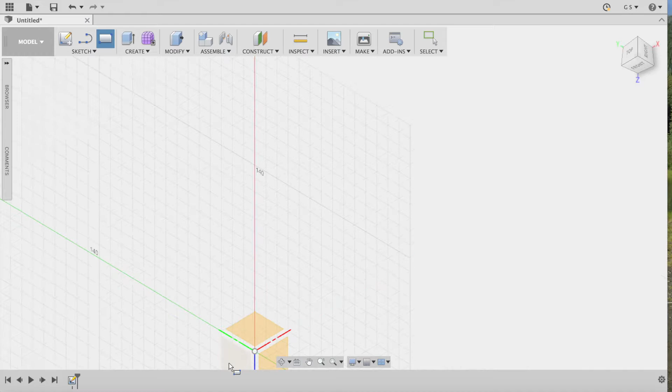We're going to click in the plane. It's a little hard to describe, but if you're wondering what I mean by the plane, we can select to have our sketch stand up on its edge if we wanted to, but I don't. I want to choose the standard XY plane that we've got here, and for that I'm just going to click here.

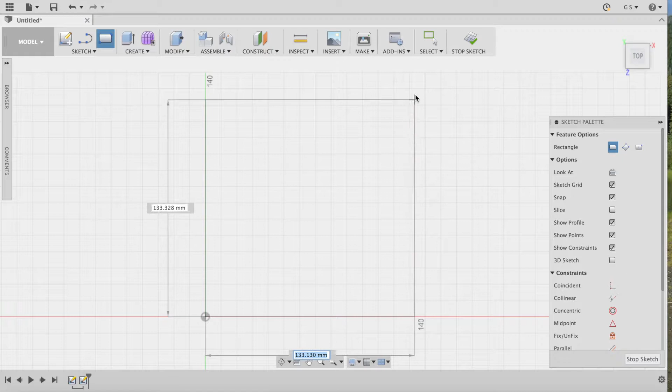We're going to use our two fingers to pan down to here, and we're going to have our one big rectangle. I'm going to click at the origin, making sure that I'm snapped to it—that's what the blue box around the origin means. So we snap, click, and snap to our grid here, and there's our rectangle.

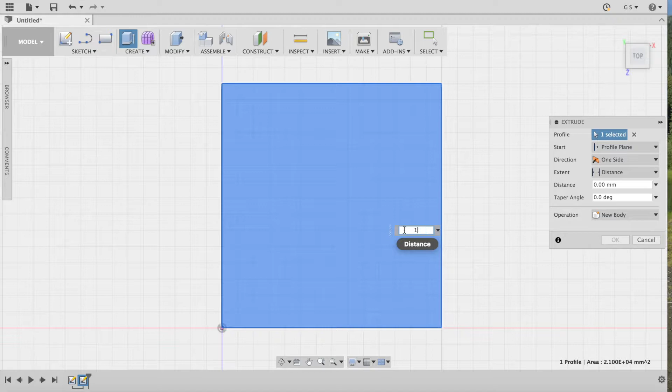So we stop our sketch, and now we're going to select this and go to Create and Extrude. It's selected already, and according to our design we're going to make this 1.5 centimeters, or 15 millimeters. We'll press OK, and just so you get a chance to see what it looks like, that's our base right there.

Okay, so the next part is going to take a little bit longer, but we now need to design the constituents of our pieces. Oh, you know what, I just noticed something—if I were doing this in front of a live audience, I'm sure someone would have mentioned that all of a sudden I'm not designing a square here. So we need to be able to modify this so that it's actually a square. You know, no big deal, we can fix this.

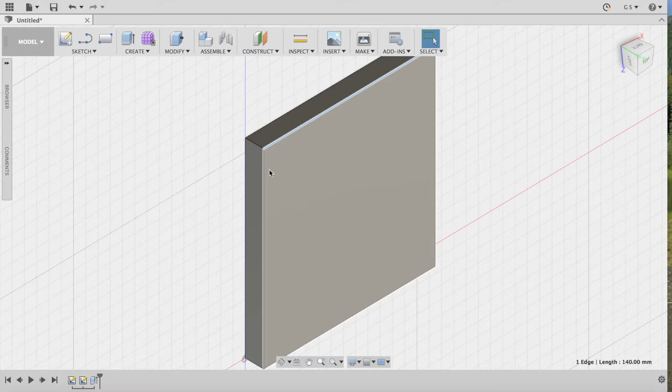I'm going to look at our tool here and go to Modify, then Press Pull like we've done before. I want to select this face. Okay, there we go—I'm going to get rid of the edge here, I don't want a fillet. Not sure why it did this to me. I want Press Pull, and I want to press this face in by 1 centimeter.

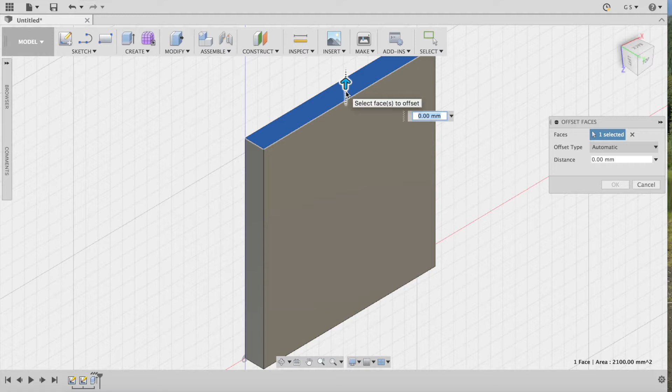All right, so now I'm just going to go back to my face, and we're going to push. By default, this is the positive direction, so I actually made this rectangle 1 centimeter too long. That means I have to make this -10, and then you'll see that I get the square back. So the cool thing is that even when you make mistakes in Autodesk Fusion 360, you can fix them—it's not that big a deal.

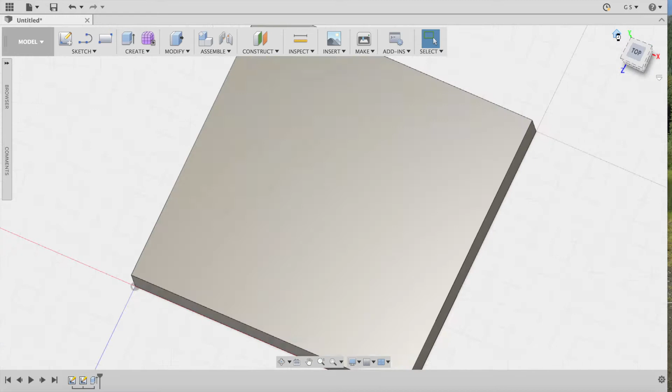So just to go back to our base—there it is. We'll do a pinch motion just to get back to here, and now it's time to make some pieces. What we're going to do now is go back into Sketch and make a 2-point rectangle. As we said before, I have to click my plane, so I'm going to make this in the same plane as I made the base here, and I want to make a rectangle, or in this case a square.

If you remember before when we were doing the design, I was thinking of making my squares or side lengths all 20 millimeters, or 2 centimeters. But then I realized that might make the edges of the puzzle a little bit weak because they might only be half a centimeter big.

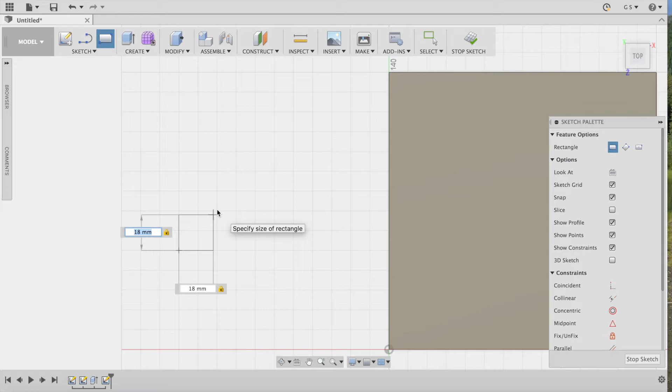So I'm going to change the design a little bit and make my side length equal to 18 millimeters, or 1.8 centimeters. I'll put 18 in here, press Tab to get to the next dialog box, and type 18 there as well. All I'm doing is making my square a little bit smaller than the full 2 centimeters, so that when I put all the pieces together, the edges will be a little bit larger. I just want to make sure everything fits. Now I'll press enter, and there's my square.

The next thing I'll do is go to extrude, click on the square, and make it 13 millimeters, like so. We're done there. Next we have to draw our triangle.

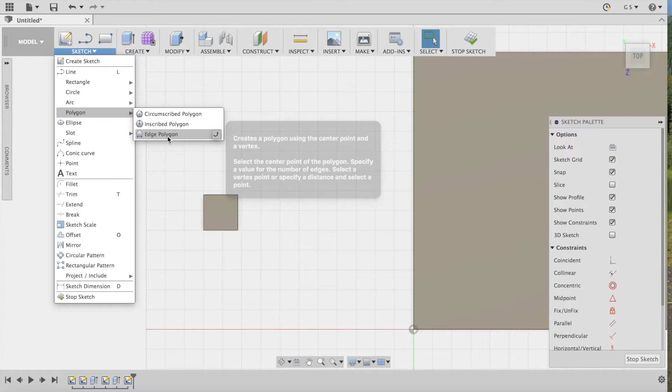It's an equilateral triangle, so we're going to go into sketch, and then into edge polygon. This basically draws a regular polygon for you with a side that's exactly what you specify, and then we'll be able to specify the number of sides. It's a pretty cool tool, nice and easy for what we need.

I'm going to click here, and I'm just about to click my second point, but we want to make the side the same as our square, so that becomes 18, like so. I'll press Tab, and we're going to press there. Okay, that's good.

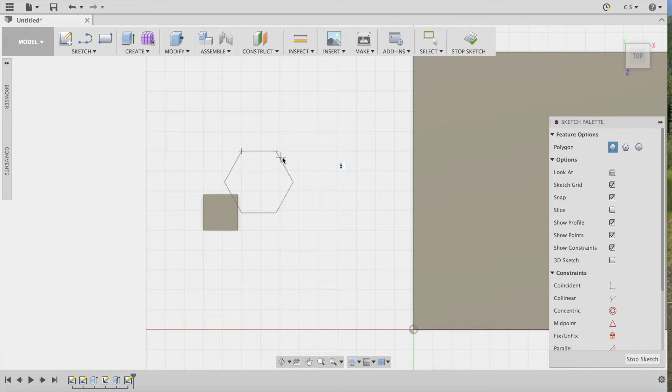Excellent, now I have to go in and figure out how many sides to make this. I have to admit this is a bit strange and you can hardly see it, but there it is, it showed up: edge number. So we want this to be a 3. Now we've created a regular triangle, meaning all the angles and sides are the same, and the sides are 18 millimeters, or 1.8 centimeters, matching the square.

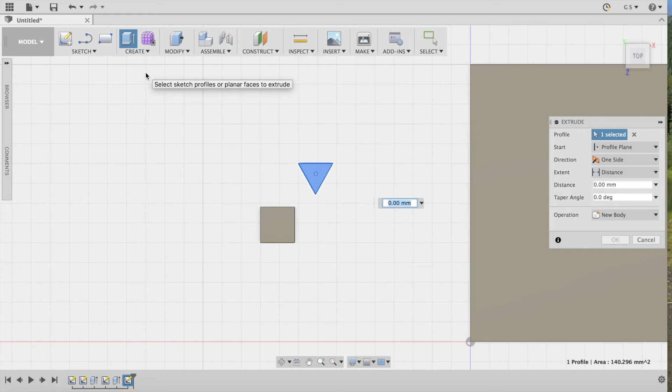I'm going to press return, and there's my sketch. I'll go over here to stop sketch to get rid of that dialog box, select our body, go to extrude, and go to 13 millimeters. This is already highlighted, so I just typed in 13 and pressed return.

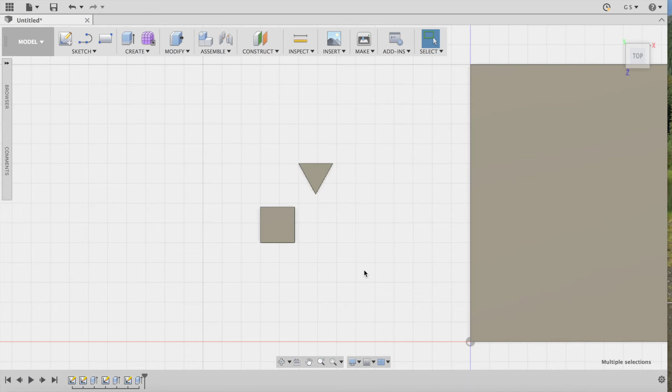And there I have my two shapes. Alright, so now we're going to pick up our shapes and copy them. Actually, I remember now, I have to go to move first, so you press M for move. We're going to select our two shapes, our two bodies, and go to create copy, like so, and we're going to pick these up and double them like this. Then we'll press OK.

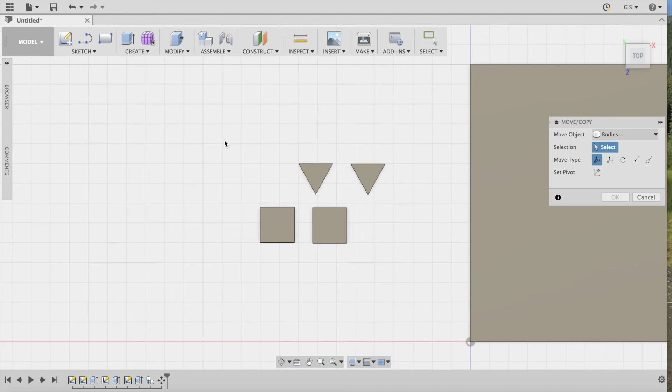We go to move again, select all 4 bodies this time, go to create copy, pick them up and move them, and now we're going to have some extras, like so. And one more. I'm going to play around with these right here, and then as I need them, I'm going to create some extra copies.

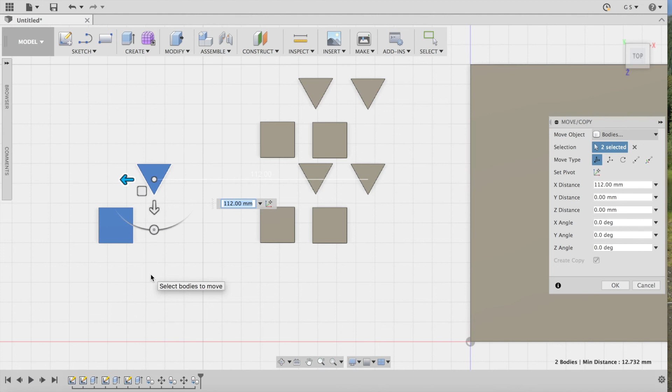So actually what I really want to do here is select one triangle and one square, put them off over here, and as I need extras, we can start playing around with that whole thing. I'm going to press the move menu one more time, select this body, create copy, and pick them up and move them over here. The reason we're doing this is that it will guarantee we don't have a whole bunch of leftover hexagons like we did with the hex puzzle.

Alright, so the next thing we're going to do is start to align these pieces together, and we'll do that in the next video.